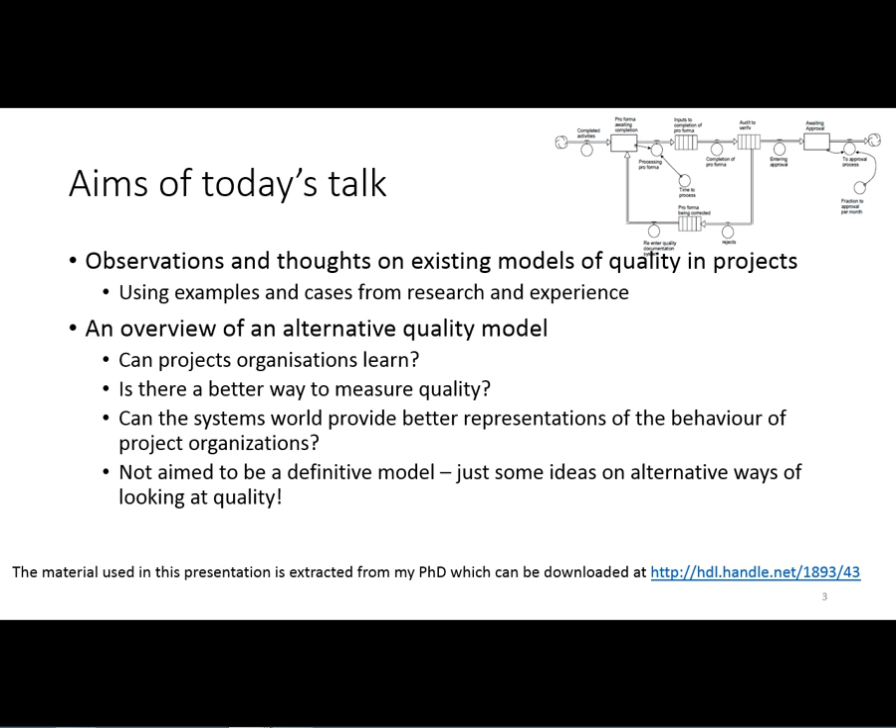Okay, why quality? Well, when I was an engineer, way back in the 80s now, it seems like a long time now, I first encountered quality systems. Quality systems like British Standard 5750 was introduced to me in 1985 by a very good engineer that I respected heavily, and it was on a large high voltage cable project in Glasgow, putting in a 275 kV cable from one end of the city to the other, which actually provided power for at least half of the city.

And the way it was introduced to me was, well, if we standardise a lot of what we do, it means that there's a certain modularity about how you can work as an engineer. So if I was posted to another site in another location in the UK or even overseas, the drawing system, how the office was set up, how the site safety operated would all be standard, and therefore there'll be an improvement. It would be better. People would know how we want to work. There'd be standard procedures, which would also be able to help in training new members of the project team, all of which I felt was a really good idea.

The issue for me happened when quality systems became operationalized and became embedded, and the actual rationale for them in improving quality seemed to disappear. It seemed to be more about a bureaucracy, it seemed to be more about checklists, about tick boxes, and it wasn't tackling the fundamental problems with quality. There was a quality industry that sprung up.

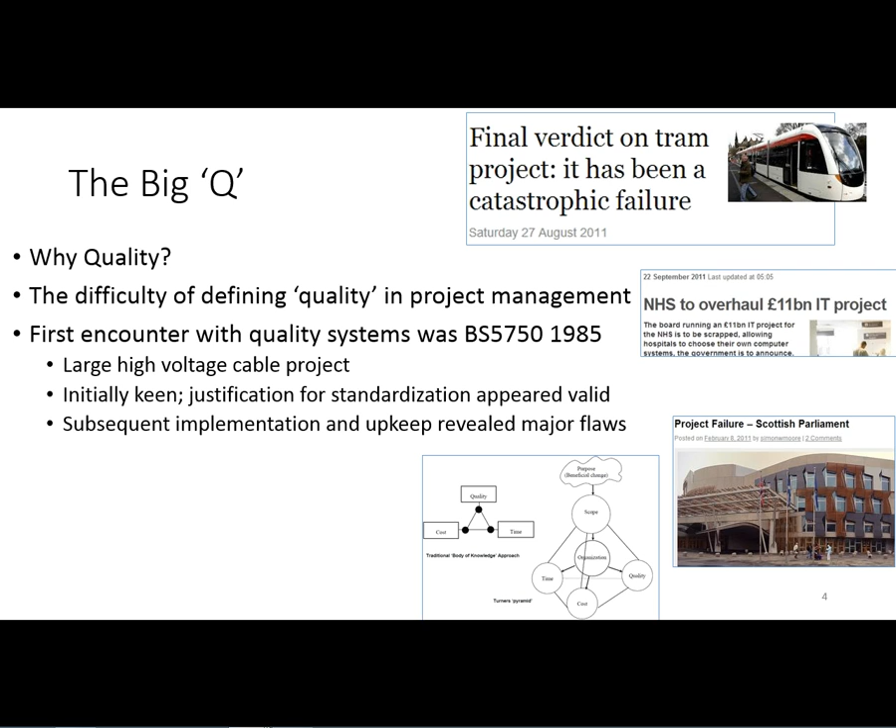So there seems to be an issue as to how we look at quality, how things are done, we seem to make mistakes time and time again. We're not learning from them. And that's just one of the simple things that I was looking at in my PhD, and I'm going to talk about here.

Here's my worldview of quality. And I apologize for my pronunciation here, is it Weltanschauung in German, the worldview, my worldview, which is from a middle-aged 50-year-old ex-engineer who works in academia.

This is how I interpreted what quality control, quality management and total quality management were. So for me, the existing quality model of quality control was actually, at a project level, meeting the specification, nothing more, nothing less. Quality management was kind of moving on, at the project level, to actually meeting the real requirements.

You might have the specification or the bill of quantities for the project, but as a project team you realize the customer or client possibly needed more than just what was being specified. The intangibles that most project organizations provide, their expertise and knowledge, and how they can guide the client to get the product or service they actually want at the end of the project.

And then you moved on to total quality management. To me, total quality management interprets to learning and improving from the project experience. You have a project, you do something, things go very well, or things could go really badly during the project. You might meet your deadlines, you might not, but how do we improve from that? How do we learn from that in the future?

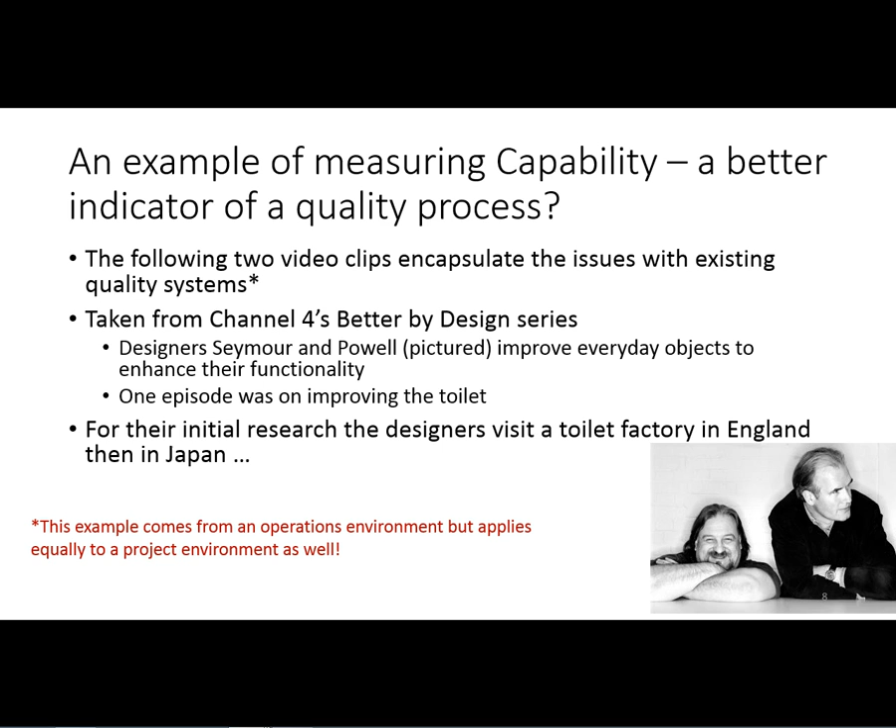Now, we've got a slight technical issue here that we discovered the other day - I can show the video but the sound is not going to come through. So if you'll excuse me, I'm going to do a dialogue over the video to try and put forward what the video is saying. I'm not a trained actor, but hopefully you'll get the idea of what's happening in the clip.

So first of all, this is toilet testing as it's done in the UK. The two designers are being shown around the factory in the East Midlands, and this is how they test toilets in the United Kingdom.

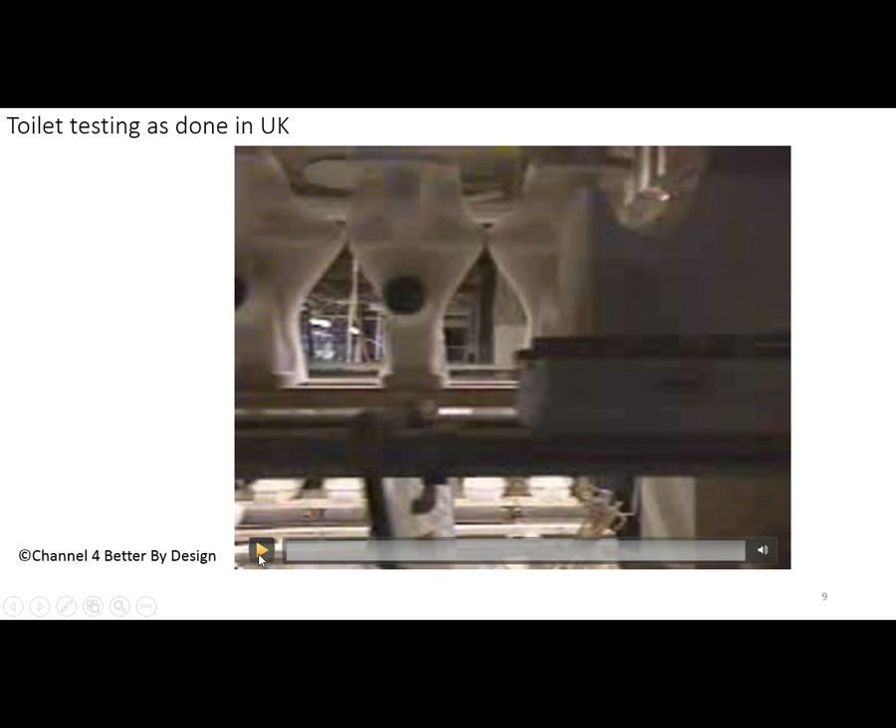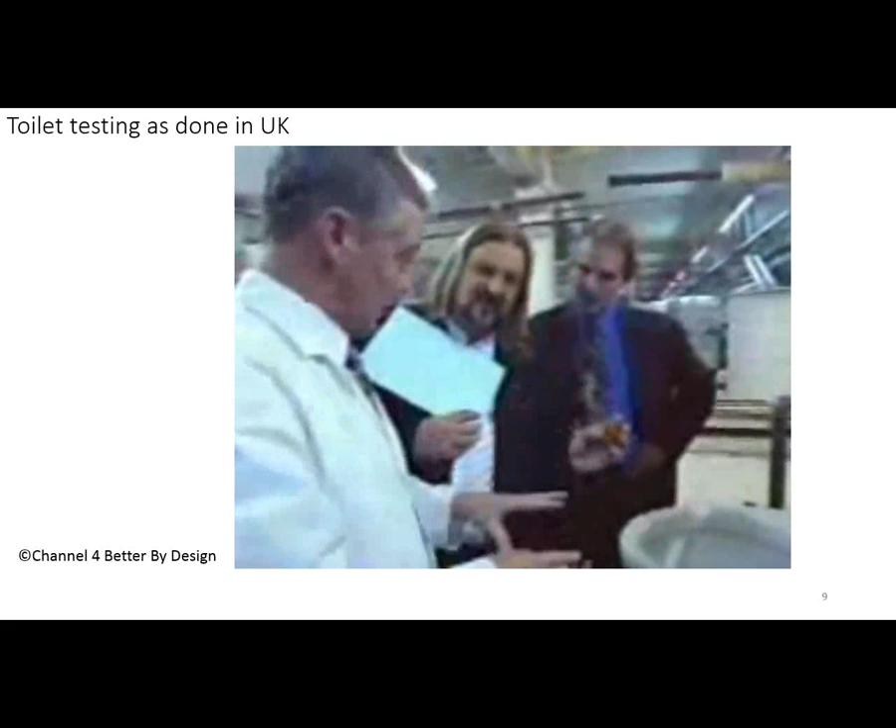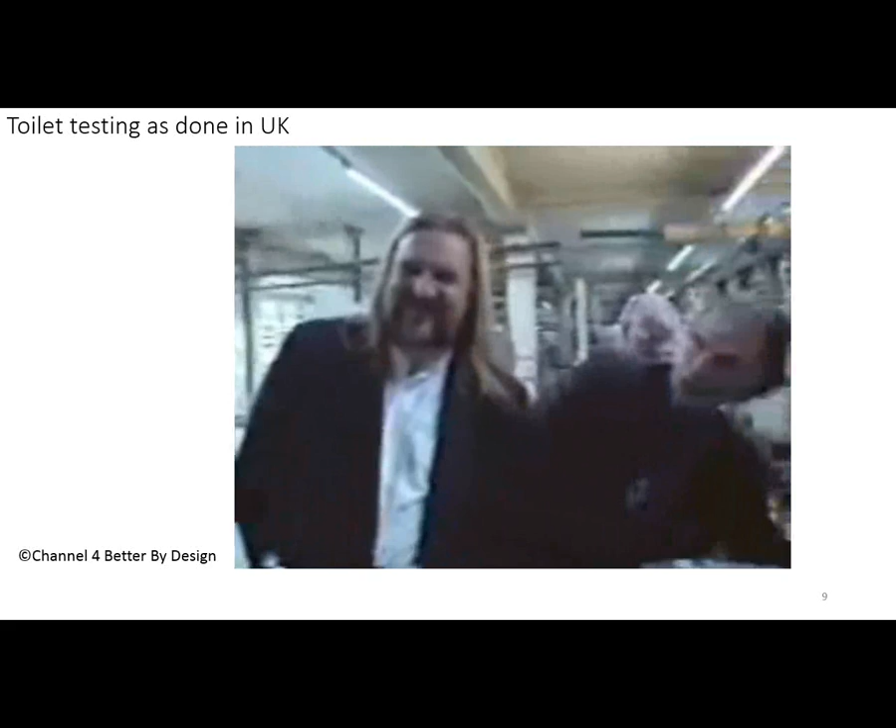It's a labour-intensive craft, more related to the potter's craft than manufacturing science, and as part of that it's just knowing how the clay will shrink and distort in the heat. After it's shrunk, the toilet has to pass the exact British Standard flushing test. The quality engineer gets a BS British Standard ball of a certain diameter and weight - that's the laid-down standard. He shows it to the designers, who say 'it's a simulated stool' - yes - then he says 'drop it in.' The quality engineer drops in the simulated stool, flushes the toilet, and it goes through. The designer asks, 'how many balls can it take?' It has to pass the test 4 times out of 5. 'But how many balls?' Only one. 'Just the one,' he says - just the one BS ball. 'But it's a very small ball,' says another designer, picking up: 'the only thing a consumer watching us do this would think is that it's nothing like the real thing.'

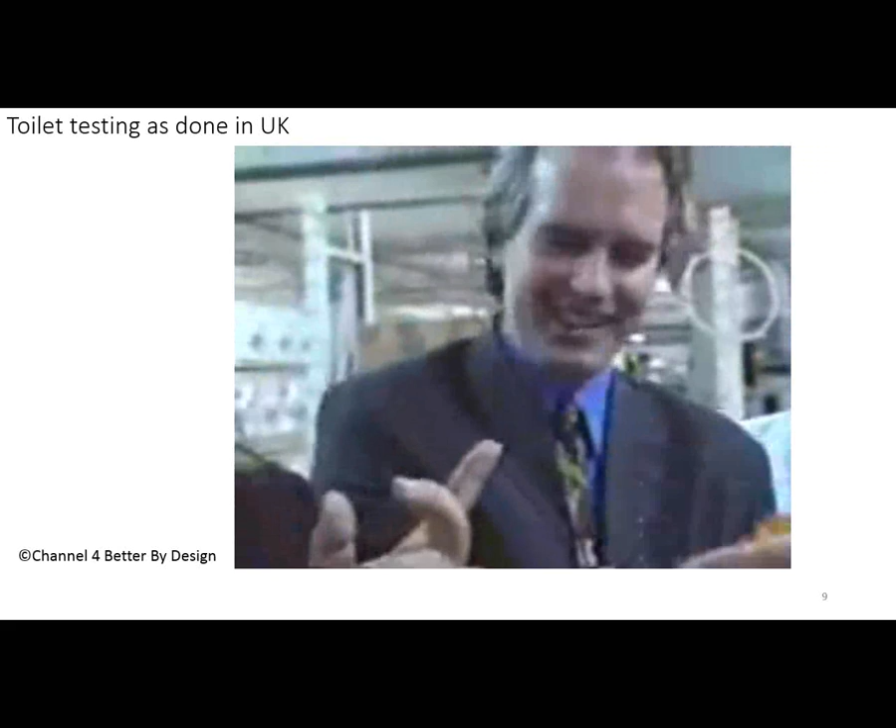And the engineer said, well, that's a British standard test. But you'd agree, they don't often come looking like that, do they? Well, I've got to agree with that, says the engineer. He says, I bet that cost a fortune because it's to specification. And the other designer says, this is a stool dummy like you get in car tests.

So yeah, that's how they test toilets in the UK. They take a British standard ball, a certain weight, certain diameter, and flush it down the toilet. There only has to be one ball that goes through that space 5 times. They don't put multiple things down.

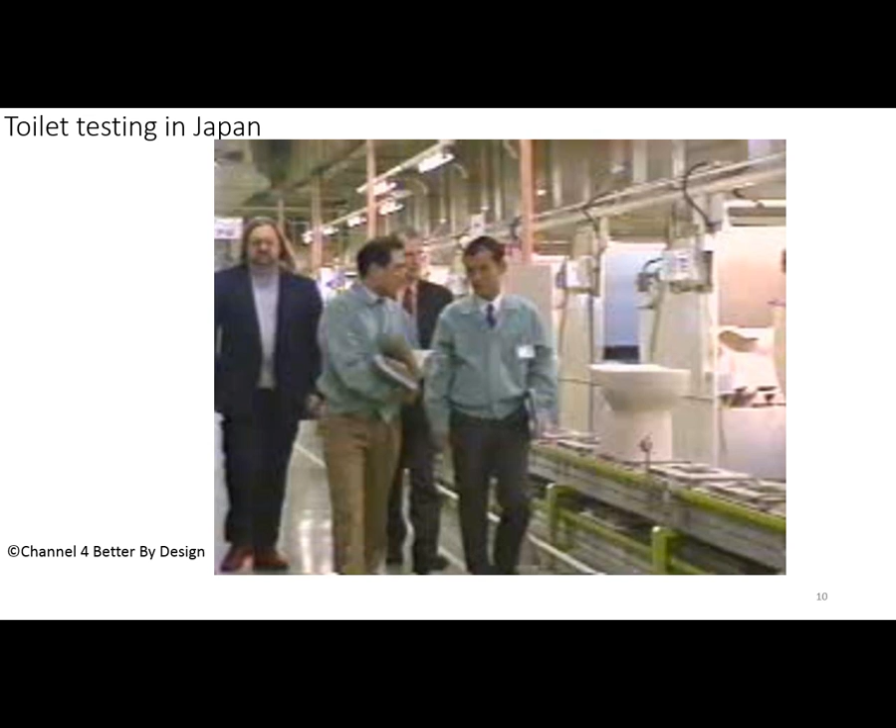Now we'll see how they do it in Japan, slightly differently. So this is them, they've come to the research department where the new ideas are tested. And again, we've got the Japanese equivalent of the quality assurance engineer. So this is them testing in Japan.

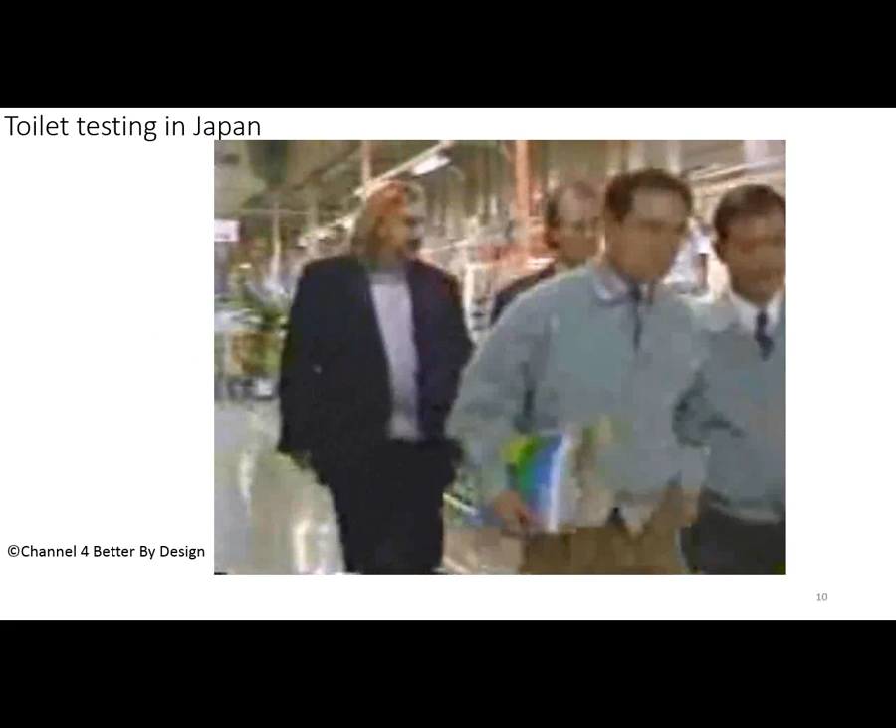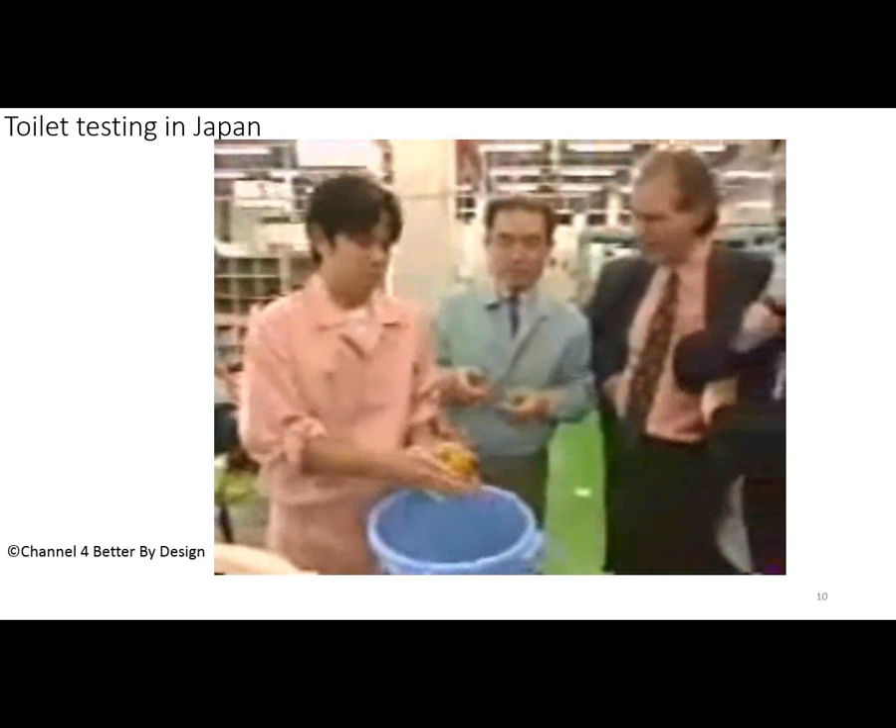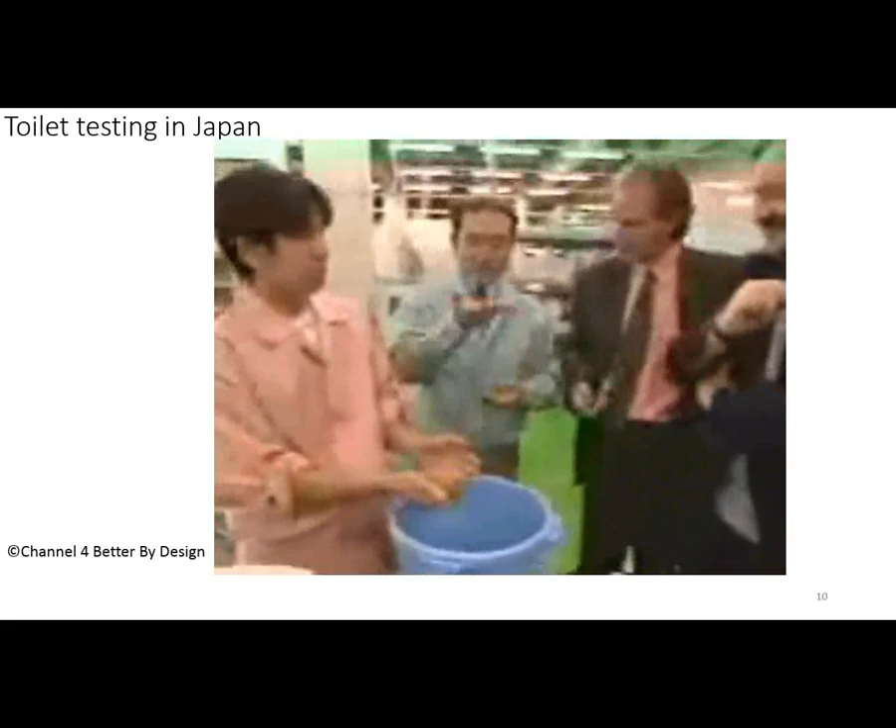I hope you've all had your dinner, this is a bit yucky looking. So what they're doing is using soya beans mixed with polystyrene beads, and the designer's asking why you're using polystyrene, and he's saying, oh, it's for buoyancy. Yes, that'll make it float and make it stand up, and the designers are saying, yeah, very good, very realistic. As you can see already, it's far closer to the real thing than the British test, horribly so.

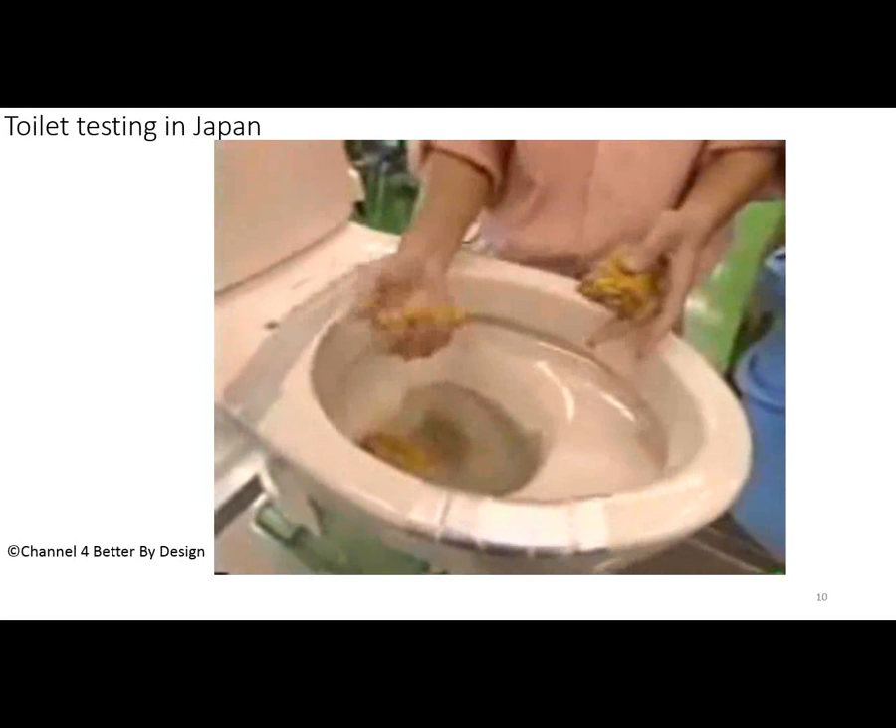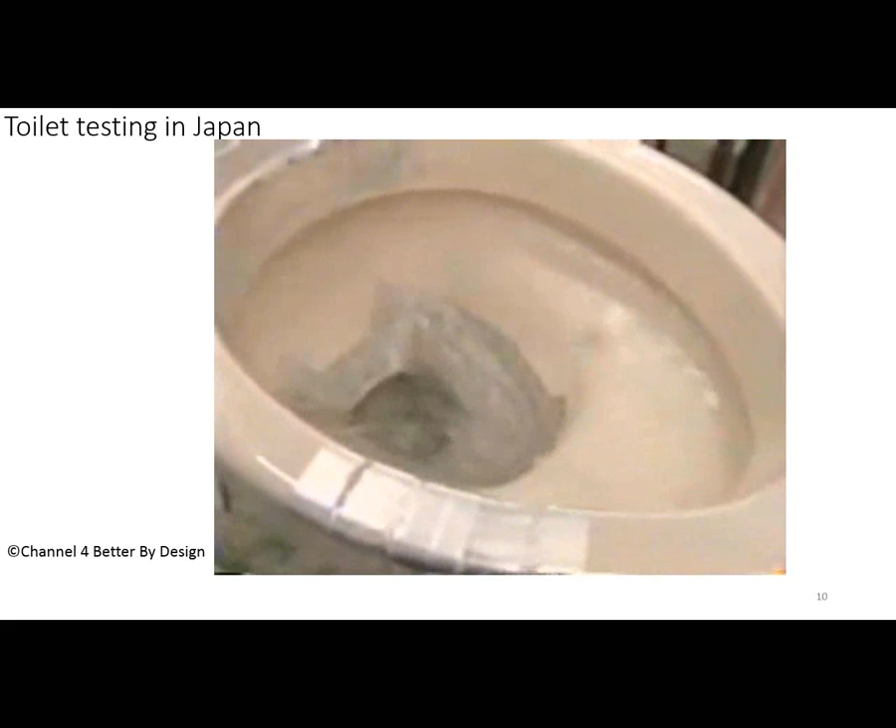And when the designer says, oh good God, and then he looks a bit queasy, he's struggling a wee bit with this test, and as you can see, he's not looking very well there. Then they put paper in as well, obviously a key facet of a toilet in the West and many parts of the world, and they all laugh as it flushes away. And the designer says, now that's what I call a test.

So that's my point: in the UK there was an adherence to a quality standard, but there was no resemblance to the actual task the toilet was needed to perform. Whereas in Japan, the quality test was about capability.

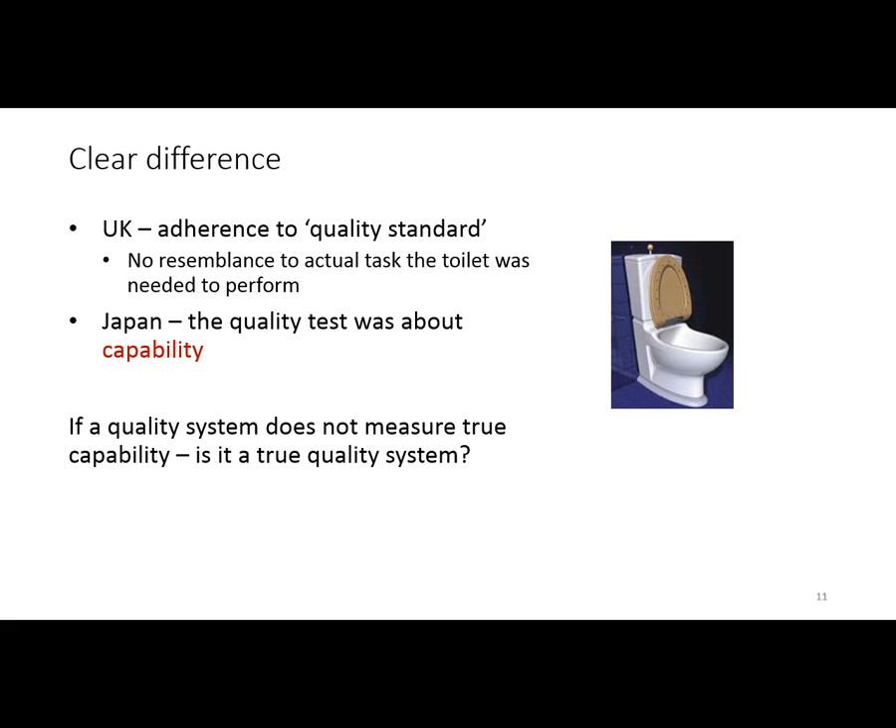Next of all, we'll look at a small case study about what can go wrong in a project, a very small project, and how you could learn from it, and how in this particular case the learning didn't take place.

But this is a project I did when I was doing my PhD. While I was doing my PhD, I was finding it difficult to get primary data. So I ended up going back to my old occupation as a cable engineer to actually do a project and use that as primary data, which the company agreed to.

So first of all, I'll just give you a quick guidance on how to install a high voltage cable in stages, sort of a work breakdown structure. Simplistic approach, but putting in cables is fairly basic engineering, so you can always use this yourself.

So first of all, you dig a long hole in the road, a long trench, preferably a busy road if you want to cause lots of chaos. You put a long cable in the long hole. Supertension cables can be up to 500 meters, a kilometre long, so you create quite a bit of havoc when you go through a major city doing this.

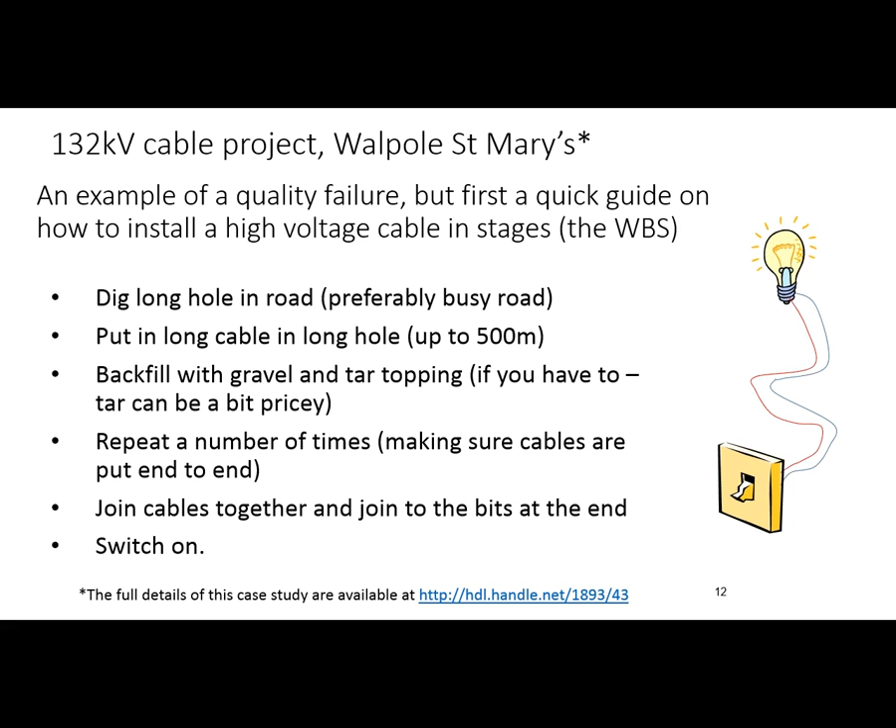Then you backfill it with cement-bound sand, gravel and a tar topping. Well, the tar can be a bit pricey, so sometimes you've got to look at other materials. Then you repeat that a number of times, making sure the cables are put end to end. Join the cables together, join the bits at the end to a power source and to your consumers, and then you switch it on. As I say, there's the full details in that document if you follow that URL. Here's the breakdown structure of who does it as well.

You have civil engineering work, teams of guys who do the actual digging and laying of the cable. Then you've got a separate team coming in to do the jointing works. Now these joints for large cables can take a week to prepare and then a couple of days to actually joint, and they're actually very expensive as well, some of them.

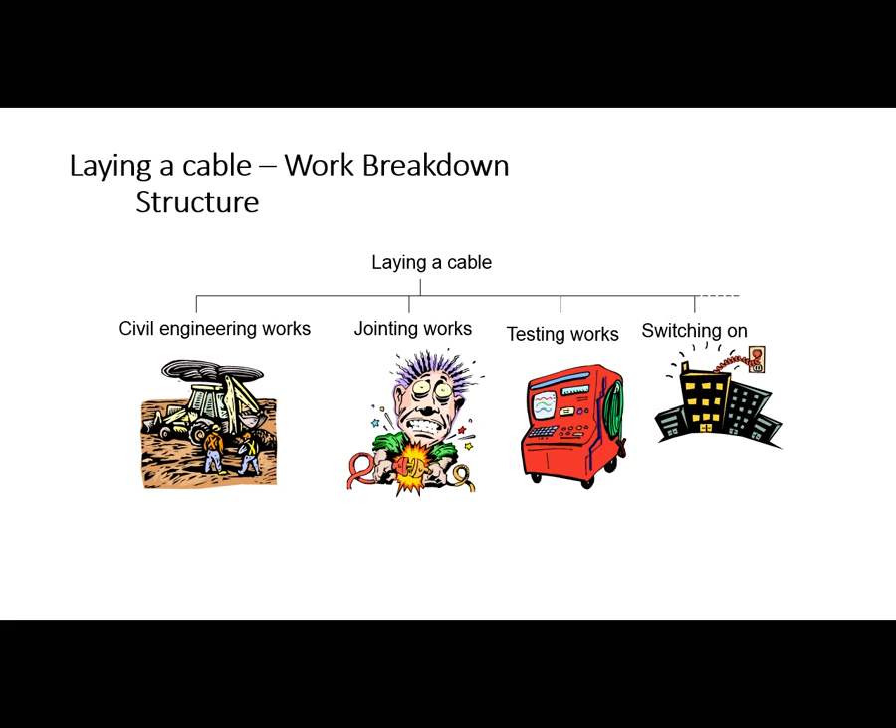In the larger cables, the 275 kV and 400 kV cables, joints can cost up to £30,000 each. Then you've got to do testing works, and then actually switch it on to power whatever you need to power. This particular job was a small 132,000 volt cable at Walpole St Mary's in England. The cable contractor was a company called Balfour Kilpatrick, who I was representing and working for as an engineer, but also as a researcher.

It was the extension of a substation. There was a new gas turbine power station being built close by, by Enron, who no longer exist. So the cable from that power station had to go in, and the substation had to be extended. It was a small, relatively generic project, not too complicated, fairly simple - £250,000 for 10 weeks. The client was National Grid, who are the company that supply the electricity infrastructure in England and the UK.

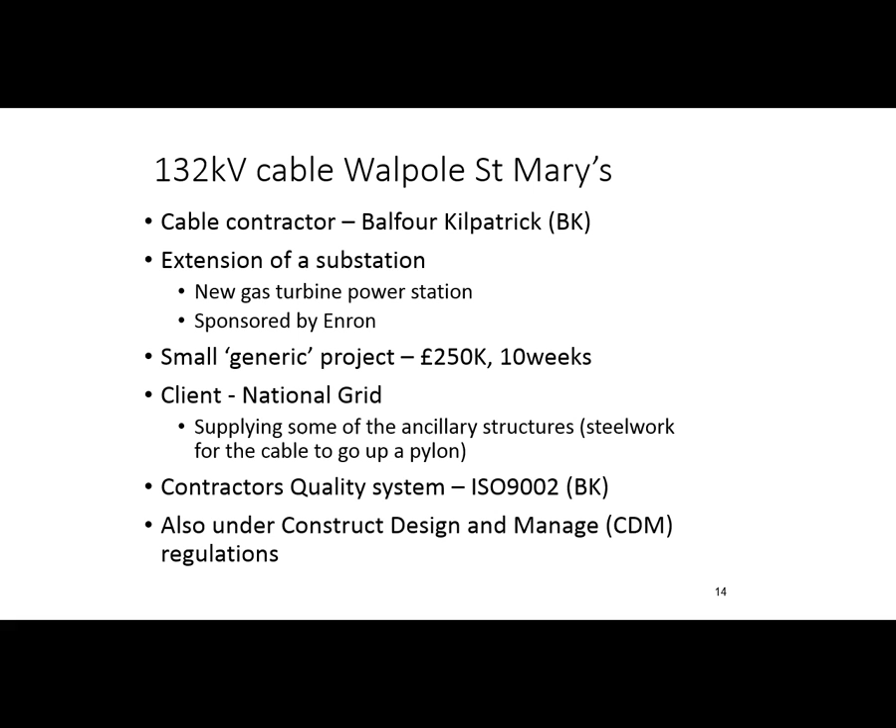They were also supplying some of the ancillary structures, the steelwork for the cable to go up the pylon, and other things. The contractor and the client had a standard quality system, ISO 9002, because this was done in the 90s. It was also under Construction, Design and Management regulations, which are effectively safety regulations that came into the UK around that time as well.

During the job I was up speaking to the jointers, the people that join the cable together at the top, and they found there was discoloured flanges and stalks out of the jointing kit. Interestingly, the quality assurance engineer said he was not responsible for resolving this. His purpose was actually just to check that we were implementing the quality system, not to actually do anything about a potential problem with the quality of the actual components. So it was interesting that we weren't allowed to question the validity of the auditable quality system.

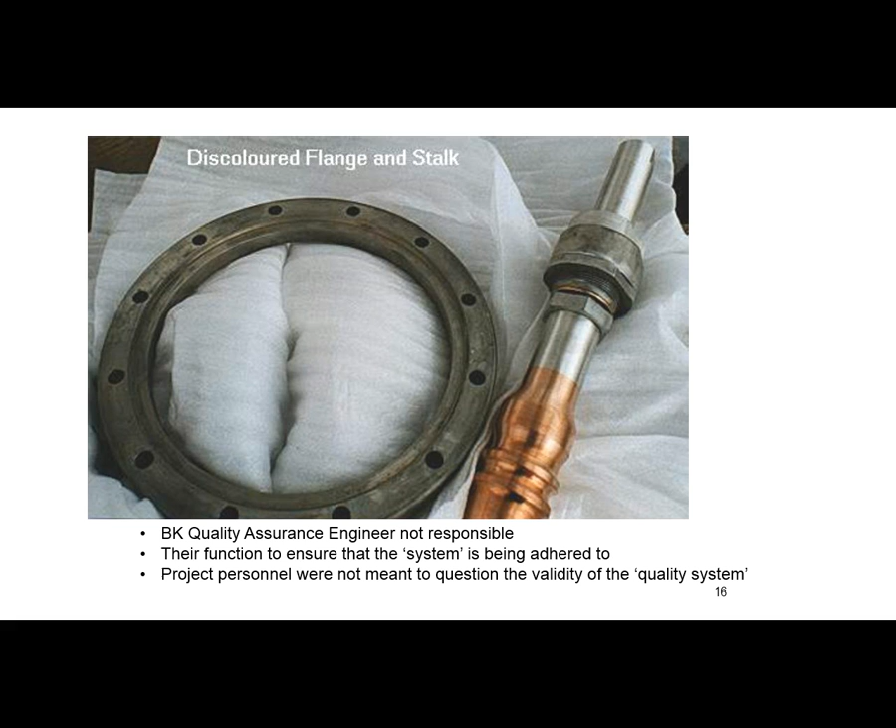The interpretation of quality, even within the company, even within a project organisation, has some interpretation and can be misinterpreted, and actually the purpose of providing a quality product or service sometimes gets lost in that mix.

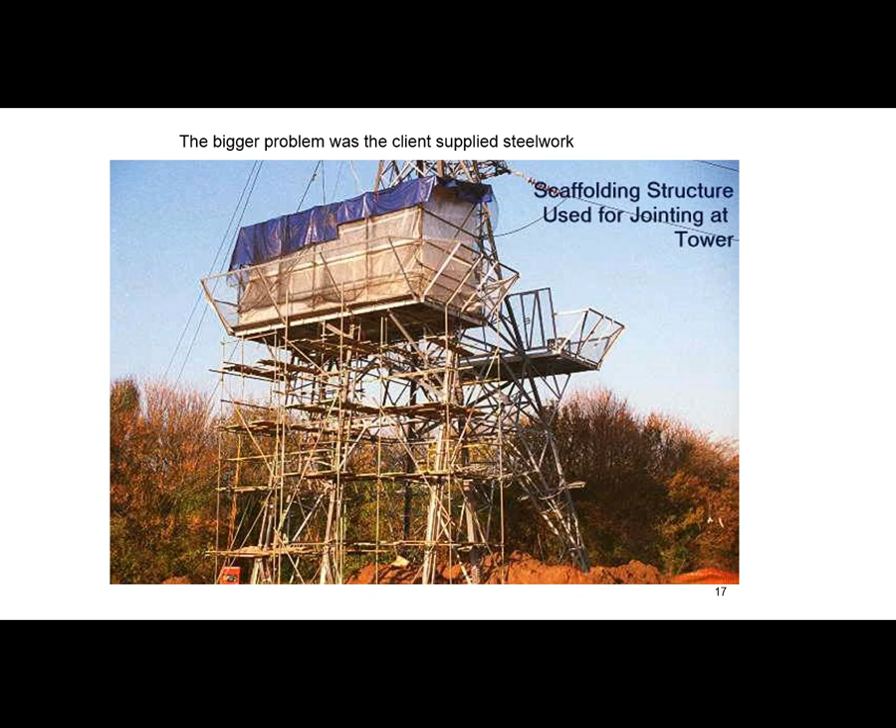One of the biggest problems was that National Grid provided the steelwork to guide the cable from the ground up to the platform. This had been modified - normally these platforms were 6 metres up, this one had to be 10 metres up, so that's round about 30 plus feet from the ground, and that was where we had the near miss.

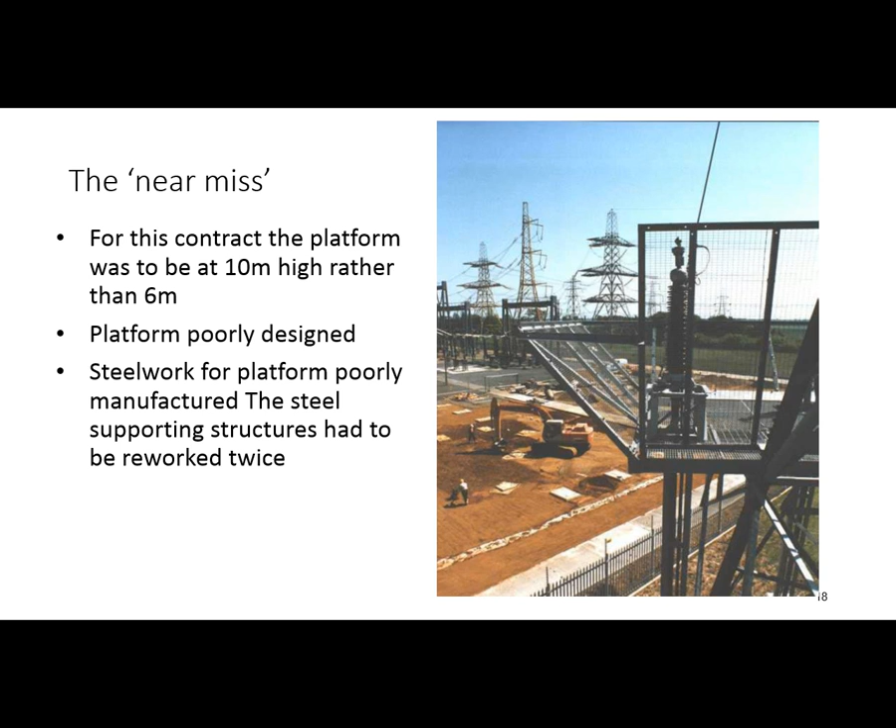The platform was very poorly designed. The steel supporting structures had to be reworked twice on site because they'd been poorly designed and poorly erected as well. The platform had been erected by National Grid's own personnel.

Now they were disgruntled because they had actually been second choice to do this. The original contract had gone out to contractors who were too busy, and so it had eventually come back to them, so they felt they were second choice for doing this job. This also led to the mix-up in that the platform had been put up poorly, so there were human resource issues and industrial relationship issues that led to the near miss, the incident that happened.

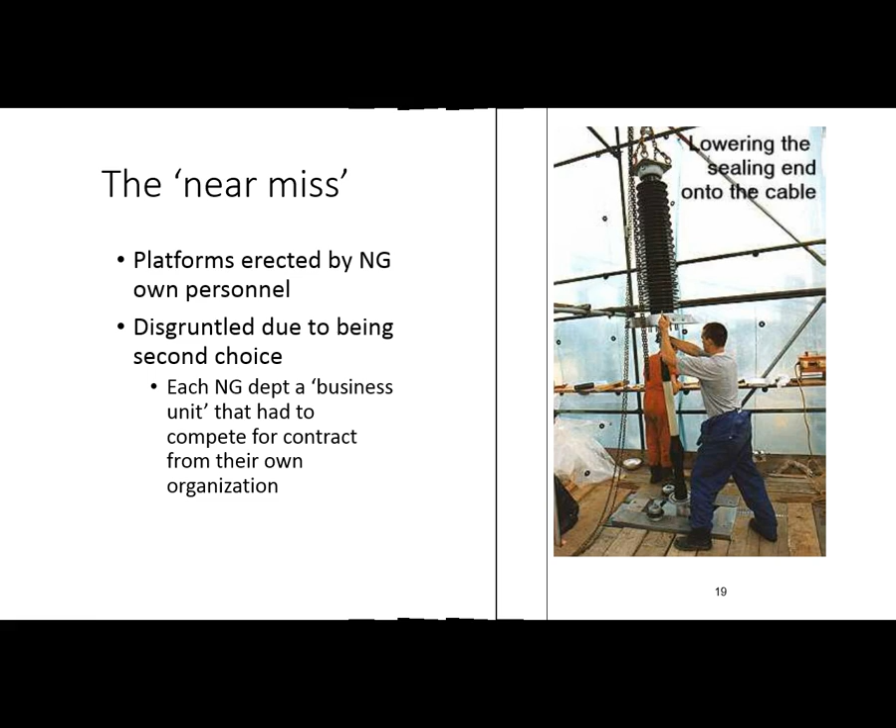What was the near miss?

Well, we had one of National Grid, the customer's engineers, up on the platform watching the cable being connected from the overhead line to the cable. He was standing on the platform, and all of a sudden the platform floor gave way, just like he was in a hangman's gallows or platform.

He fell through the platform. Fortunately, he was a larger gentleman, and he got jammed as he went through. But the plate fell through, narrowly missing beheading two of my workmen working underneath. Then it hit and damaged the cable. The engineer was left dangling basically 10 metres above the ground, and if he'd fallen he'd have been, if not killed, seriously injured.

Very interestingly, he did not want to report this incident. He didn't want to report it as a near miss because there was a blame culture in evidence.

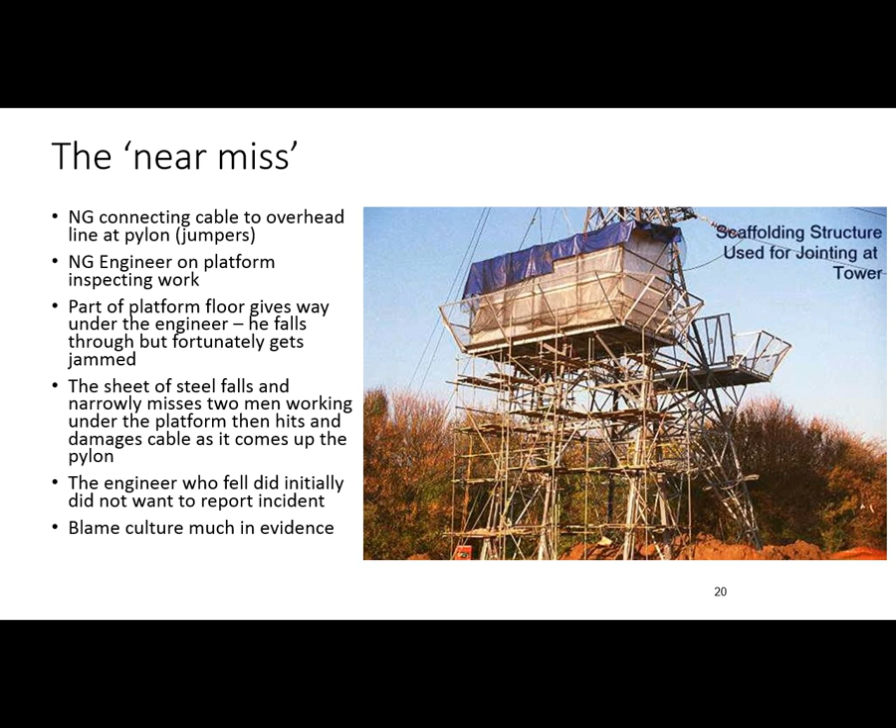Again, it goes back to this idea of admitting to mistakes. Obviously it wasn't his fault that the platform had collapsed, but people were at fault. And the problem was, rather than looking at that and saying, okay, we did wrong, we've got to do something differently, they wanted to blame someone. And unfortunately that's where, again, quality systems can fall down. We don't have the ability to self-reflect and actually look for solutions rather than look to blame.

Cable had to be repaired. We offered to repair the platform as the contractor on site. The offer was accepted. Despite this, after all that had happened, the National Grid project engineer asked for the quote to be as cheap as possible. And at no time did we have any follow-up action regarding the poorly designed steelwork, the suppliers, or National Grid's work putting up the platform.

There was no lessons learned taking place at any point in time, despite both client and contractor being ISO approved, and the facility for this just didn't seem to exist. And that was pretty sad because you thought this could happen again quite easily. It was all too apparent this could happen again.

So again, learning is difficult because projects are finite. The personnel move on after the project finishes, sometimes before the project finishes, and sometimes the project organisation loses this knowledge entirely. What we need to do is try and capture the good and the bad. Actually, the bad is better. We tend to learn from our mistakes, both at a project level and also an activity, event level as well.

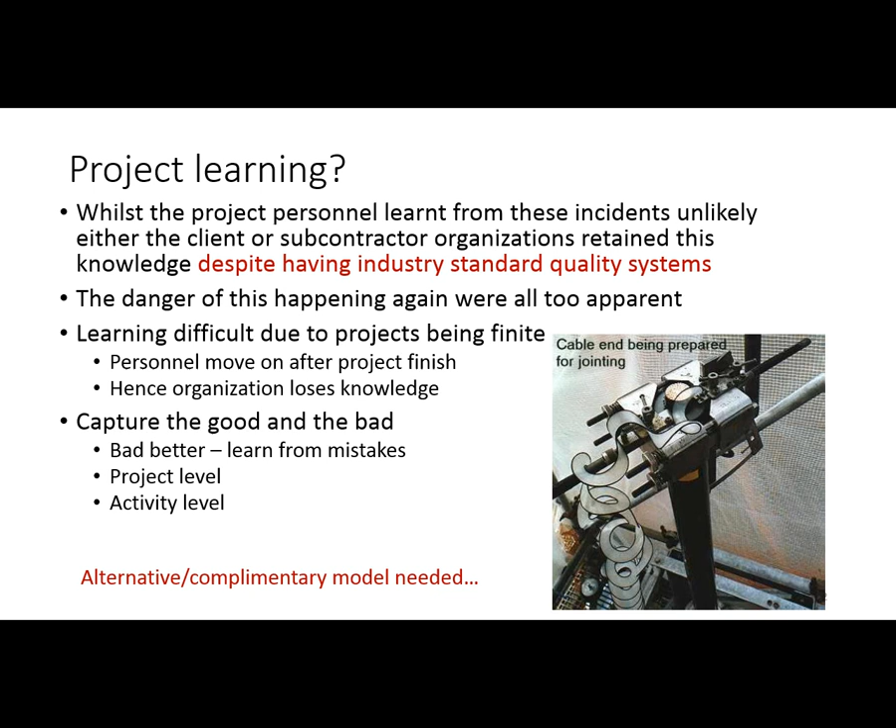And this is what led me to think that maybe we should be looking at alternative complementary models rather than just relying on standards. So this is where I was trying to look for an alternative model using a knowledge-based quality system.

First, I was looking at methodologies and tools that would capture behaviour, capability, feedback, and also promote learning in projects. So audits, for example, weren't just snapshots. They were more like videos where we reflected on what we did in a project, but it fed forward as well, and the learning was kept in the organisation too.

So I started to look at a systems approach. I work partly in the management science department at Strathclyde as well as the business school. My PhD was in a management science area because that's what I did as my first degree.

So I started looking at systems thinking, the techniques like examining your mental models, causal loop diagrams, systems archetypes, which are quite often associated with Peter Senge. I also looked at system dynamics as a progression from systems thinking, and I used the software to try and model some of the behaviours I witnessed, although I tended to just use it as a tool to illustrate things. I didn't go on to use it to study further projects. Maybe that's something for the future.

I also am a great fan of soft systems methodology, the work done by Peter Checkland, creating rich pictures and using the CATWOE mnemonic, looking at virtual systems and then trying to bring these back into the real world as well.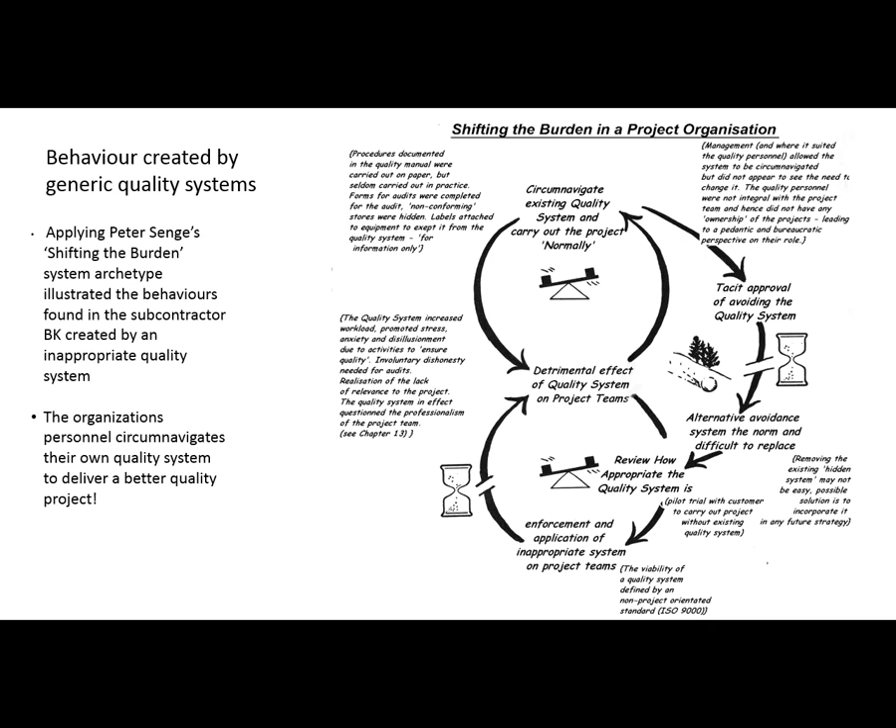So how do we move to project learning, which is effectively double loop learning? Well, what you want to highlight are the unusual events and also the good events as well - the positive and the negative. Then use that for individuals to adjust their actions in response to new information and alter their mental models, which is double loop learning at an individual level.

Then you look at the possibility of changes in the shared mental models between the project team - everyone looking at what's gone wrong, altering how they think, which should lead to organisational learning, or organisational double loop learning, which again feeds back to the next project and how you capture that and move forward.

Now, obviously, this depends on having a blame-free culture. It also allows what John Seddon very creatively calls creative anarchy to flourish, allowing good ideas to surface and be used without being restricted by a formal quality system. And if the quality system is good, it should then feed into it in the future.

What I did was adapt Juran and Gryna's feedback loop to look for the key parts of what a knowledge-based quality system would consist of. They showed a process which led to a sensor and a comparison, and the actuator - typically things from control engineering - and also a goal.

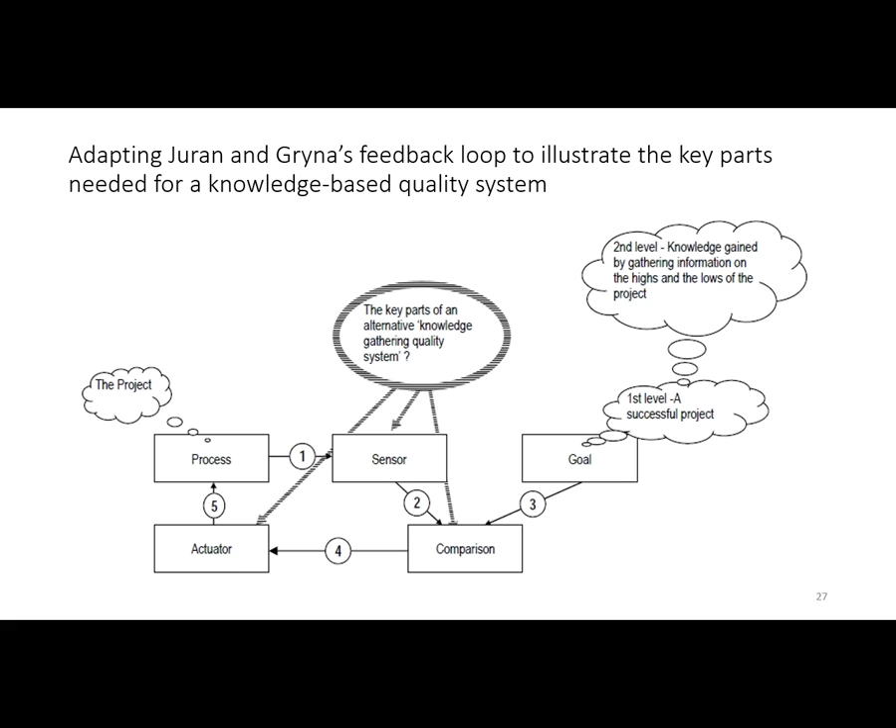So I superimposed my ideas of where the key parts of an alternative knowledge-gathering quality system would be. The process becomes a project, the goal becomes a successful project, but at the second level you have knowledge gained from gathering information on the highs and lows of the project, which then feeds forward into the project process.

Taking that another step further, the actuator becomes a flow of knowledge from the previous project events, from the synthesis of previous and existing projects, and moves forward to create theory leading to a more informed choice of action in the future.

As every project is unique, the outcome of past actions can never be taken for granted when used elsewhere, although it should be able to reduce risk.

The comparison section compares existing knowledge with what has happened in this project and adds to knowledge, or learns about other ways an activity or project can be tackled. The background goal is to add to the project organisation's knowledge database and improve their capability through knowledge. That capability can either improve future projects or increase the project organisation's capability to do wider projects outwith their normal scope.

Finally, I've taken all of this and tried to identify the relationship between risk and a knowledge-based quality system, using causal loop diagrams from the systems world. The idea is that existing quality initiatives don't really account for risk, which is really an inherent part of project management - you can never get rid of risk completely.

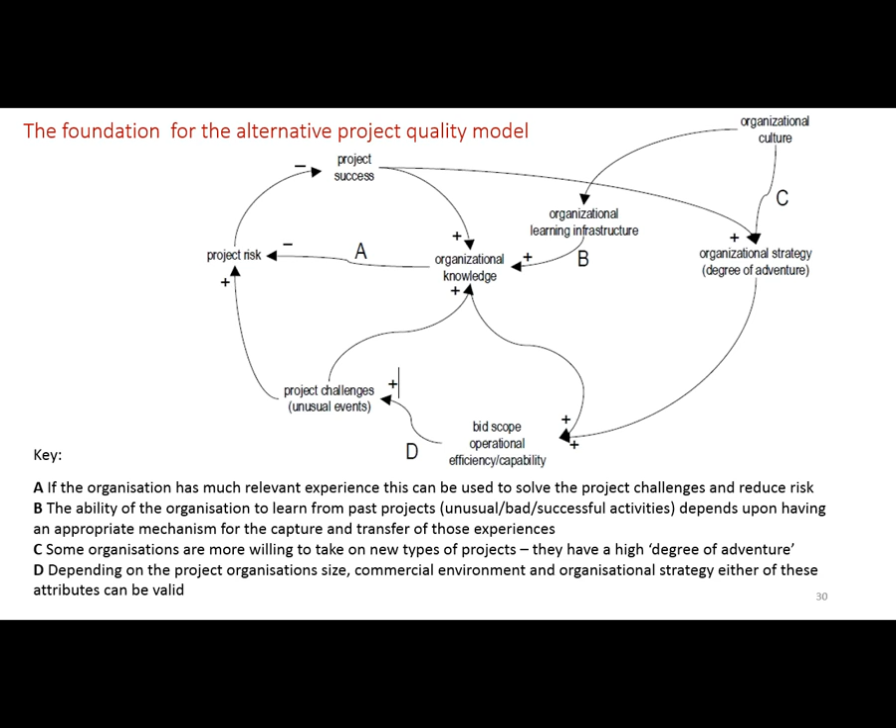Just to conclude quickly, as I'm coming up to the end of my 45 minutes: quality in the context of project organisations, I believe, should be redefined in terms of their capability, as opposed to their adherence to standards - how they deal with previous project challenges, including things where projects have gone wrong. They should have a portfolio of how they dealt with them to show clients. Organisational strategy - their degree of adventure, whether risk averse or adventurous - and they shouldn't be damned either way. It should be put in the context of what they've had to deal with in the past.

Project learning infrastructure - how they capture knowledge, particularly failure. Do they utilise double loop learning? Do they learn from their mistakes? And how do they increase their bid scope or efficiency in making unique projects routine? That's my hypothesis, that's my world view.